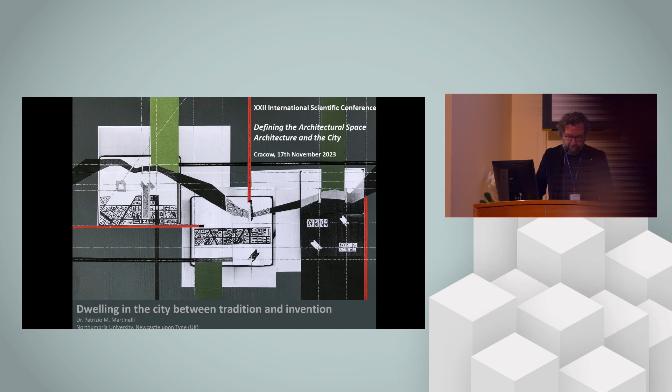One of the most fertile aspects in the investigation of the relationship between architecture and the city is how tradition and innovation influence the urban context in their intertwining, overlapping, and even in their opposition. The city, in fact, is a repository of signs and materials that endure and upon which the intervention of the new is grafted in a succession of human actions and traces that mold the urban environment in layers and juxtapositions.

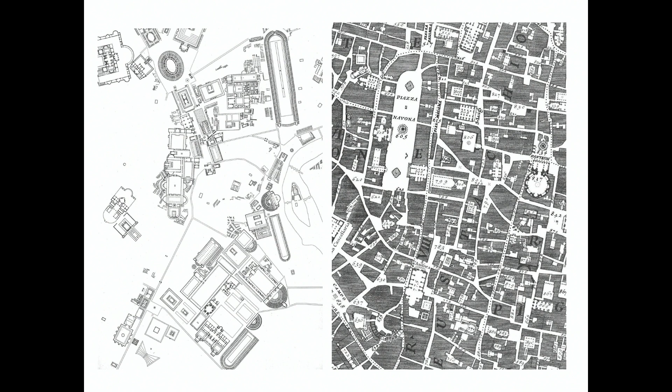In particular, the question of dwelling offers an opportunity to examine how this theme has been interpreted in the attempt to construct the human environment in the necessary creative continuity to respond to the demands of life and the aesthetic needs of humans as they vary and persist over time.

In the context of a reflection on the architecture and the city, and considering dwelling as the primal constituent element of this relationship, we can recognize certain forms of dwelling that can be found consistently in European cities: the linear block and the courtyard building types.

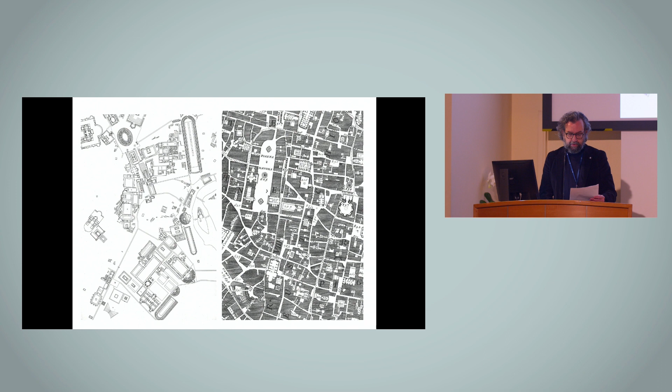The direct relationship of the linear block building with the street and the other public spaces, such as the square, the park, the garden, is one of the most peculiar aspects that construct the residence and at the same time structure the city. We could recognize the origin of this configuration in the linear portico structure of the Greek city Stoa and Roman city Forum, where the repeated and serial element of the colonnade precisely configures a public and semi-private space at the same time, both open and protected. This kind of relationship is evident in the development of the traditional urban fabric of the European city.

Similarly, the memory of traditional spatial configurations can be found in the architecture of courtyard building types. As an illustrative example, Palladio's palaces in Vicenza, with their open-air atriums, can be interpreted as a monumental reinterpretation of the Roman courtyard house. But not only. Giorgio Grassi and Aldo Rossi, for instance, have emphasized how the model for this urban building type can be found in rural houses and collective structures, such as convents, schools, hospitals, whether located in urban or rural areas.

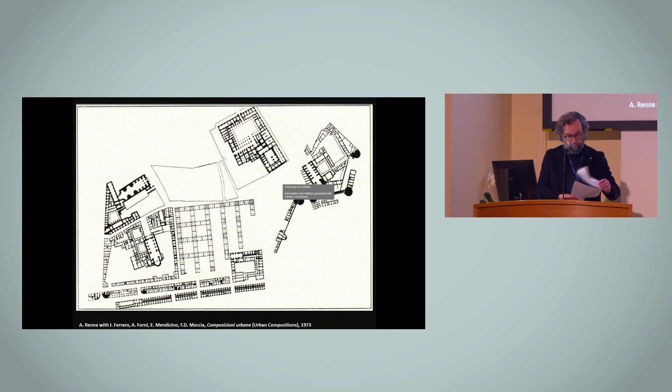With the crisis of the 19th century city, the building types and urban configuration of the traditional city needed to be challenged. The critique of the corridor street was the key aspect in Le Corbusier's idea of renovation of city planning. The Swiss master in the 1920s noted how the city has become a congestion of buildings that grow greater, interlaced by narrow streets full of noise, petrol fumes and dust, a picture of the seventh circle of Dante's Inferno. This is, of course, Le Corbusier's words, in which the fabric of the traditional city, though fascinating in its picturesque aspect, was where, quote, tuberculosis, demoralization, misery, and shame are doing the devil's work among them.

The street, according to the narrative of Le Corbusier and the other modern movement thinkers, was no longer the harmonious construction of public space and architecture based on human scale and perception, but a dangerous and unhealthy place, poorly lit, noisy, defined by insalubrious traditional residential blocks. In this context, the masters of the modern movement turned towards a series of responses to the problem of housing and city construction, which, despite the apparent rupture, we can actually see as an interesting reference to tradition.

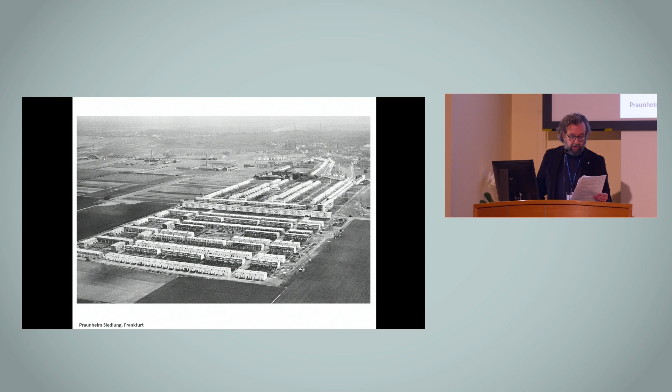In the 1920s, German architects and planners developed the settlement typologies of the Siedlungen. The use of geometrical grids and patterns, the orientation following the heliothermic axis, and the renewed relationship with nature, private and collective gardens, parks, almost represent a recovery of the historical principle underlying the origins of town planning and the design of cities. The linear block, a recurrent residential building type in its different variations, would be recognized by the modern movement designers as a natural and virtuous evolution of the urban blocks of the historic city, as May and Pagano argued.

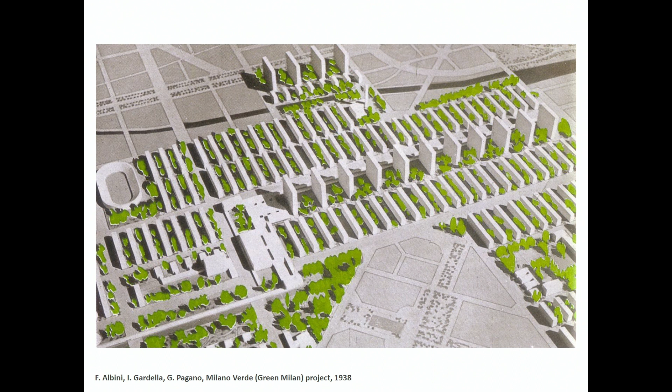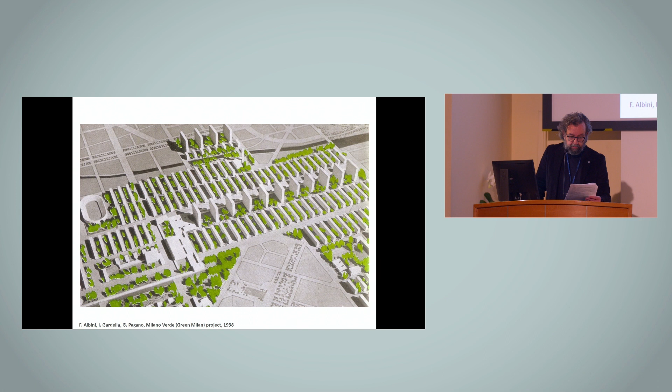All of this is evident in the Italian context in the 1938 project for Milano Verde, Green Milan, proposed by Franco Albini, Ignazio Gardella, Giuseppe Pagano, and others. The project for the area Sempione Fiera in Milan applies to the existing fabric a rigid Cartesian grid that has been defined as abstract for its unconditional and pure geometry, but as noted by Raffaella Neri, it is abstract, quote, in the sense of general, of universal, abstract and geometric, because it's demonstrative, because its geometric order contains and displays an idea of architecture, an idea of a city, end of quote.

And after all, it has the same virtuous abstraction represented by the long thread that connects the Hippodamian grid of the Greek city and the Roman centuriatio that designed the Italian landscape to the Renaissance ideal city, up to the urbanization of the American continent.

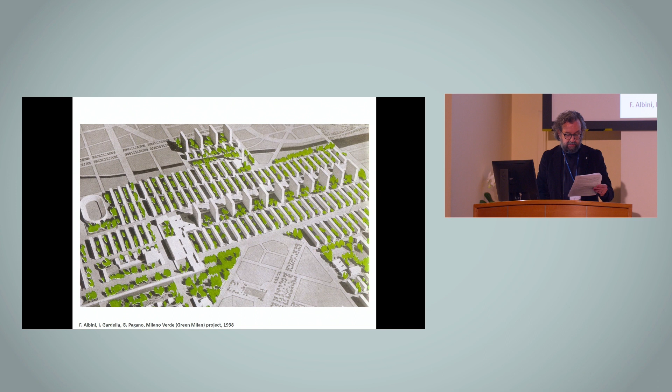The courtyard type, transfiguration of the courtyard house or the cloister, and the linear block type, reinvention of the portico, the forum and the stoa, show the continuity of memory, history, and tradition in the architectural and urban devices that allow the construction of the city.

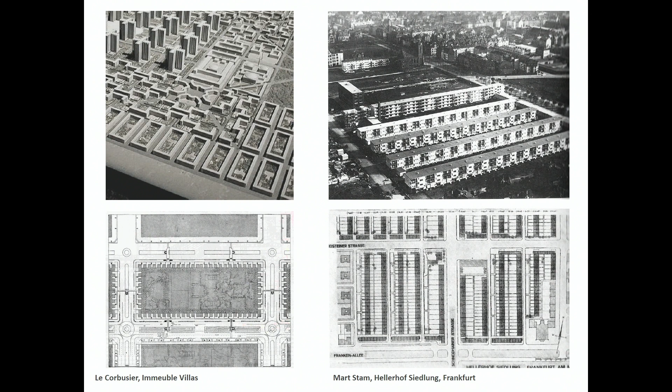My paper, included in the book, focuses on two emblematic precedents of this reflection, both designed in the mid-1920s, representing the trajectory between tradition and invention in the architecture of dwelling at the urban scale and at the architectural scale. Le Corbusier's project for the Immeuble Villa, the monumental courtyard building that represents his tendency of embodying in his work traditional types and architectural elements, and the modernist reinvention of the urban fabric as a composition of linear blocks in Mart Stam's Hellerhof Siedlung in Frankfurt.

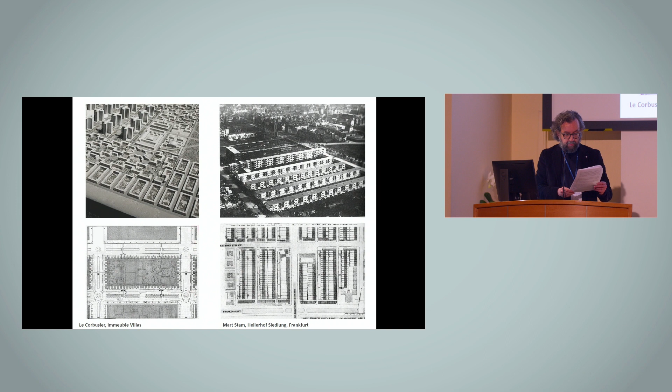But today, I will discuss only the theme of the linear residential block and its reinventions between Germany and Italy in the 30s, 50s, and 70s. The Hellerhof Siedlung was designed by Mart Stam in the context of the Das Neue Frankfurt program directed by Ernst May. The project was presented in 1929 at the CIAM in Frankfurt, titled Housing for the Existence Minimum, and later published in issue number 4/5 of 1930 of the journal Das Neue Frankfurt, which was entirely dedicated to 5 years of planning and developments in the German city.

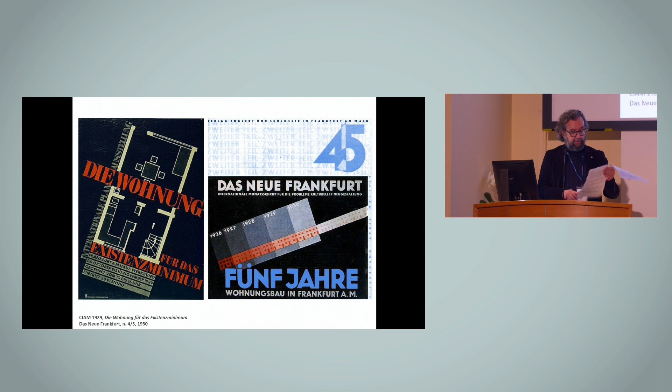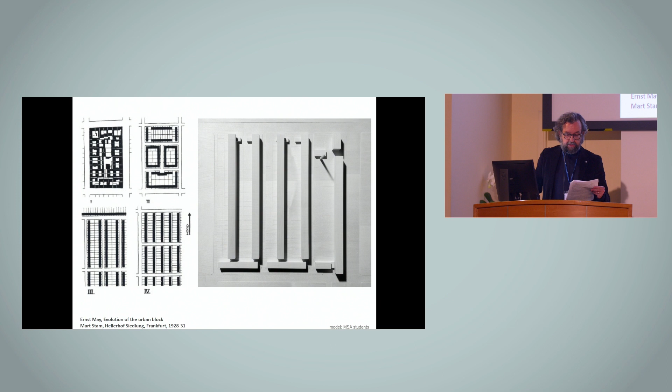The layout of the project is related to the final phase of the evolution of the urban block in the European city, as described by Ernst May in the famous diagram depicting the transformation of the traditional compact block into a system of enclosed courtyard buildings and then into a system of parallel linear buildings that construct a more open new city, which Mart Stam evoked in 1923. Quote, medieval cities were enclosed by walls, so their main characteristic became self-containment and compactness. Modern cities, on the other hand, open up towards the outside.

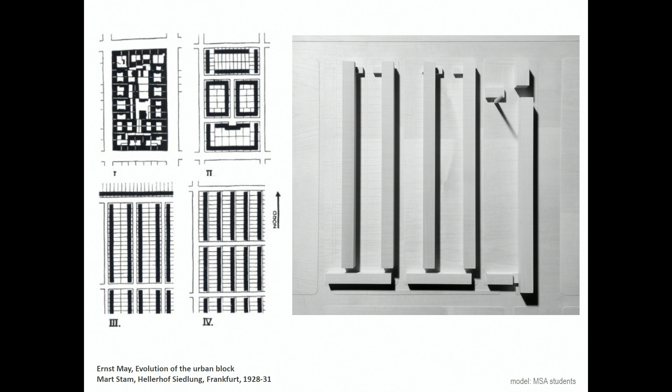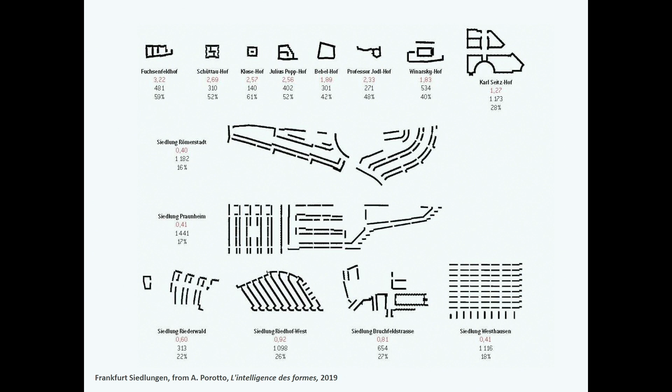End of quote. The Hellerhof Siedlung belongs to the third type expressed in May's diagram that corresponds to a system composed of linear residential blocks with open spaces in between, arranged in a north-south orientation. The majority of Frankfurt Siedlungen were built according to this organization, including Römerstadt, Praunheim, and Riederwald.

This new relationship with the street, the dismantling of the compact front of the street corridor, the study of residential types, and the rediscovered relationship with the natural elements, green spaces, which become common assets and tools for city design, as well as orientation relative to the heliothermic axis, are the cornerstones of the modern movement's search for an alternative to the traditional city.

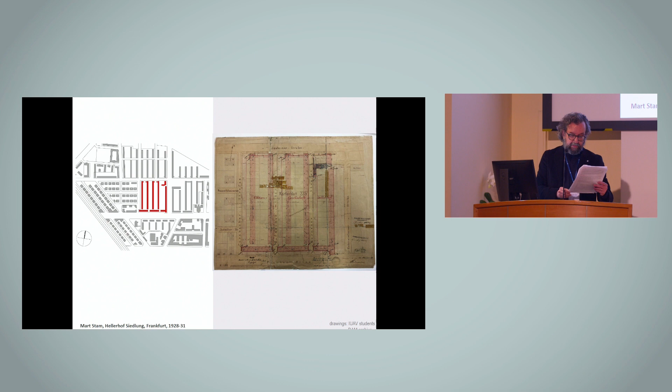The intervention includes 800 apartments distributed across a series of linear buildings of varying heights, some of which exceed 160 meters in length. There are two-story buildings oriented east-west, served by a balcony, 4 three-story buildings, and 1 four-story building oriented north-south. The buildings are spaced approximately 25 meters apart. The apartments have different typological layouts, all on a single floor, with a minimum area of 36 square meters.

They are characterized by loggias and terraces that enrich the internal space of the kitchen and living room, while also contributing to the design of the long facade. The bathroom and kitchen are designed with minimal dimensions to prioritize the living rooms and bedrooms, which are designed with equipped walls that contain niches, shelves, wardrobes, allowing for a greater availability of useful surface area for living in the house.

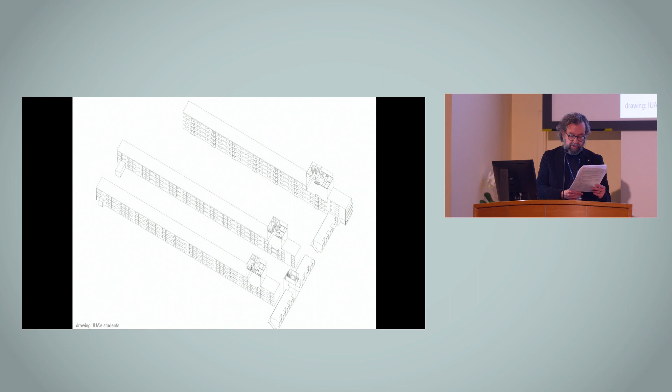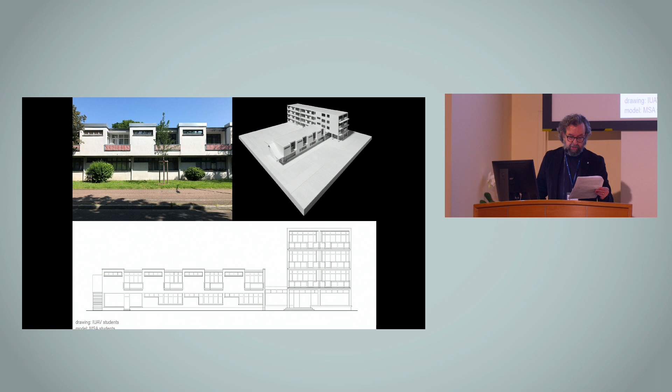Care and attention was given to the articulation of the facades, elaborately designed in relationship to their facing onto the street, as a place of interaction between the collective building and the public space for city relations. The south front of the complex is defined by low-rise, two-story balcony buildings inserted into the high-rise blocks perpendicular to the street and characterized by a rhythmic alternation of solids and voids created by the deep recesses of the loggia. The ground floor of this section is set back slightly and dedicated to commercial activities.

The north facades feature a system of columns that support the upper floors, defined by the transparent and aerial appearance of the loggias. Some low enclosed buildings intersect with the facade parallel to the street, set back and detached from the vertical supporting elements. This arrangement, repeated for each linear block, evokes somehow a sort of portico streetscape along the main northern street of the settlement.

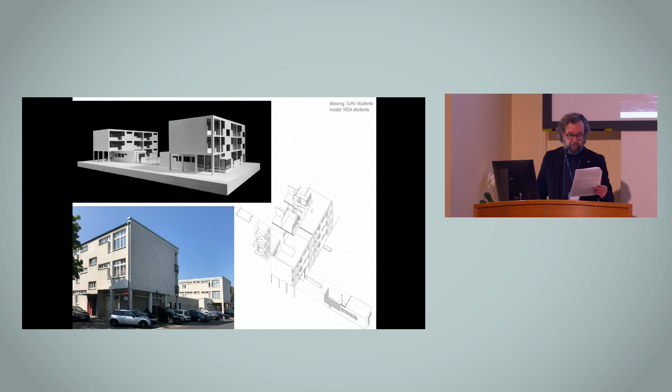Moving from the modern movement to more recent times, when architectural theories and projects tended to question and challenge the modernist dogmas represented by the previous case study, we can recognize some of these themes and architectural types in projects carried out by Italian architects for the realization of residential fragments of urban context.

In Aldo Rossi's Gallaratese project, the architectural archetype, the portico, the typical Milanese corridor hallway, the square window, a reaction to the ribbon window, and the pitched roof, opposed to the modernist flat roof, and the modernist linear block type, the Siedlung, the Unité d'Habitation, are infused with the workings, assemblage, compositions of familiar and recognizable figures and elements.

Here, invention becomes etymologically an opportunity to find and rediscover, to create, within the architectural context designed by Carlo Aymonino, the variety and complexity that represents a fundamental characteristic of the traditional city. Before Rossi, another Milanese architect well represents the continuity between the lesson of the ancient masters and the reinvention of modernity in order to build the architecture in the city.

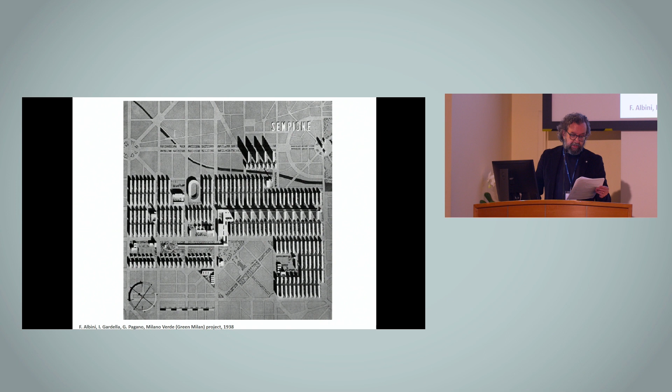Ignazio Gardella, as already pointed out, was one of the architects that in the late 1930s designed the Milano Verde proposal for Milan, a project that can be read as an expression of the modern movement urban planning that has its roots in the history of Greek and Roman cities. The project was also developed at the architectural scale, not in detail, but with a clear idea on how the building should have been designed in terms of massing, volumes, and facade solution.

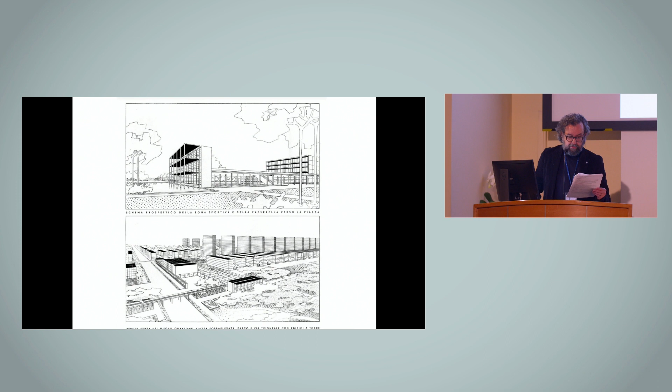One of these is a linear residential block with a glass curtain wall protected by a 3-story height portico with columns and balconies overlooking a green area. I see this schematic project as a sort of diagrammatic version and a fragment of a Greek stoa or of a Roman forum. As we know, the Milano Verde plan was not developed or even realized, but this fragment took shape in the late 40s in Milan in front of Parco Sempione, when Ignazio Gardella designed and built the Tognella house, also called the house in the park.

The main protagonist of the building is its facade. Designed as a monumental frame of columns and slabs, as a vertical composition of hanging porticos, which recalls the giant order of classical architecture in a sort of reinterpretation of Palladio's Palazzo Chiericati in Vicenza, whose origins are clearly related to the Greek and Roman archetypes.

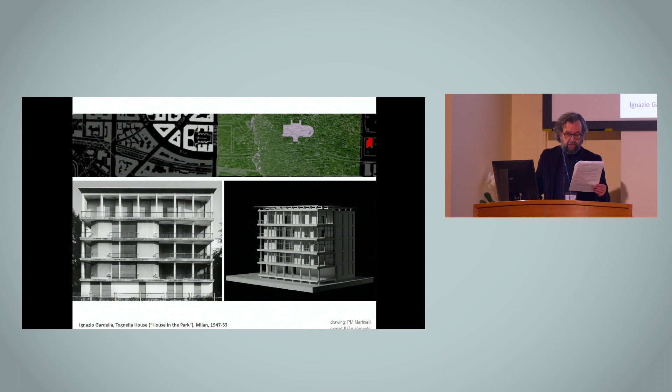In fact, as Rafael Moneo points out, Gardella's contribution to architecture is to, quote, insert on the structure of modern architecture the principles and criteria established in Renaissance and effective for centuries, end of quote, in a perfect balance of tradition and invention, of memory and innovation, with the purpose of celebrating the traces of stratification of history in the city. The building has 5 floors with 1 big apartment each.

The plan is divided into 3 rectangular spaces running parallel to the street, as in Palazzo Chiericati. The one that contains the bedrooms and the services has a conventional layout of closed rooms and equipped hallway, with an exterior envelope made of solid opaque walls cut by vertical openings. The central part contains the staircase, elevators, and hallways. The part facing the park is an open space where the dining room, living room, and studio flow one into the other, open to a balcony that runs across the whole facade.

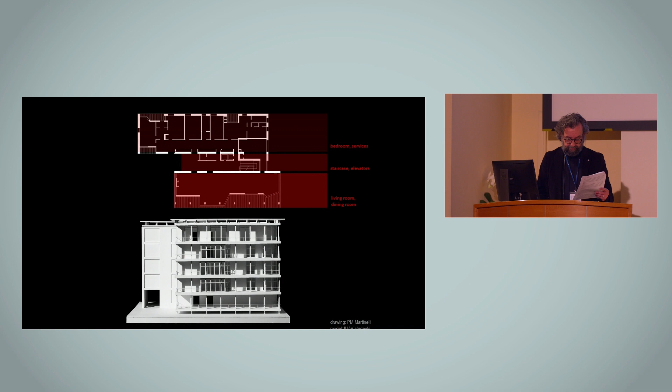The contrast with the opaque volume behind it is evident, and being slightly shorter, it appears to be a detached and independent component of the building. Behind the frame of columns, Gardella designs the envelope that encloses the interior as a broken line made of thin solid panels, but mostly of big floor-to-ceiling windows, as an asymmetrical free form flowing behind and between the pillars.

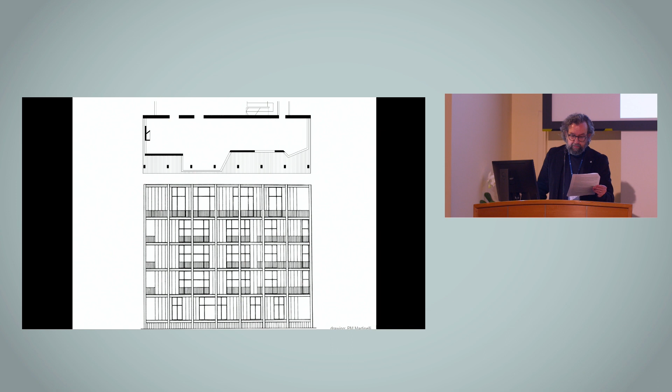This is one of the transgressions typical of Gardella's architecture, as Argan calls them, the capacity to take composition beyond the expected and the predictable as a pure act of imagination and invention. Yet, Argan notes, this is not a simplified personal gesture, abstract from reality, but a reaction to light and atmosphere and the actual life inside the building.

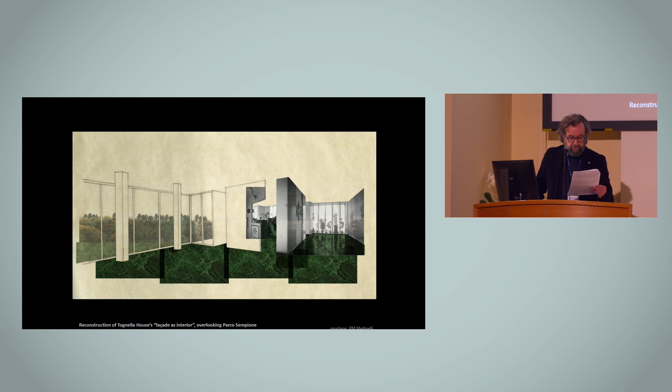From the inside, the vertical composition of the pillars frames the view towards the park, which is a consistent presence in the interior, enclosed by the transparent thin wall of windows. This flowing envelope, which sometimes incorporates the pillars into the interior, seems to extend and contract under the vital pushes of the interior and as a reaction to the outside.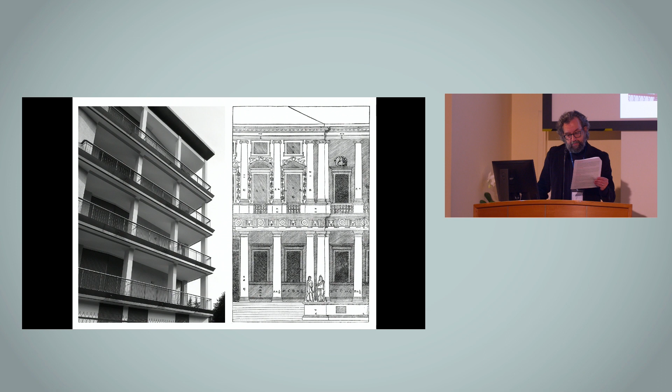As in Palazzo Chiericati, in the Tognella house, the play of light and shadow contributes to the perception of the thickness of the facade from the outside and clearly shows the tension between the classical rigidity of the pillars and the gracious and sculptural arrangement of the thin wall behind them. Since in front of the building there is an open space and a huge park, this chiaroscuro play helps to give visual strength to the building, also when seen from the distance.

This is the result of the fertile and balanced tension between memory and invention, and a tribute to how architecture and the city were built in ancient times. Thank you.